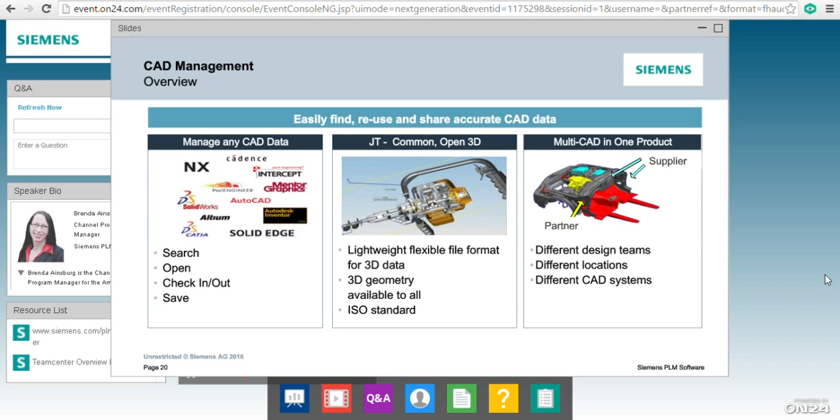I went ahead a little bit so that we look at different design teams and different locations, different CAD systems, and how that JT format pulls everything together so we can look at a whole entire assembly made from 4 or 5 different CAD systems and interrogate that, doing tolerance analysis, any type of volume analysis, how the parts are meshing together, what parts are missing, and see missing links between the other parts.

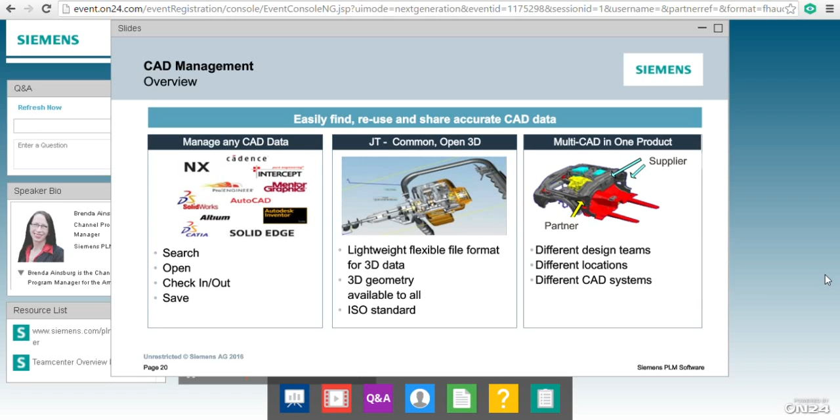So with that, we're going to play a short video, and I'll talk through it, just to let you see the kind of things we can do with Teamcenter in managing almost any CAD system.

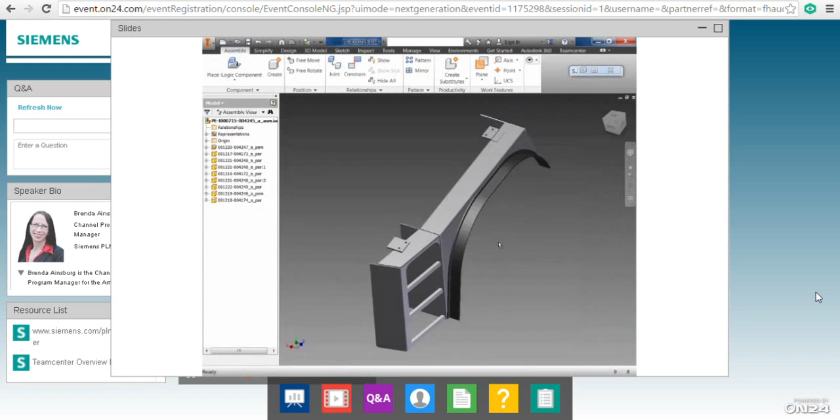In this scenario we're using the Inventor integration, so you can understand how this works with Inventor. You can see here we're in Inventor, and there's a Teamcenter dialog box at the top, a little menu screen, so the Inventor user stays in his session. This is no different than the SolidWorks Pro integration. We have the integration built right into the CAD tool, so he never has to go out of the CAD tool. He can do all his work and have all access into Teamcenter through the CAD tool, so he's not jumping around in different clients.

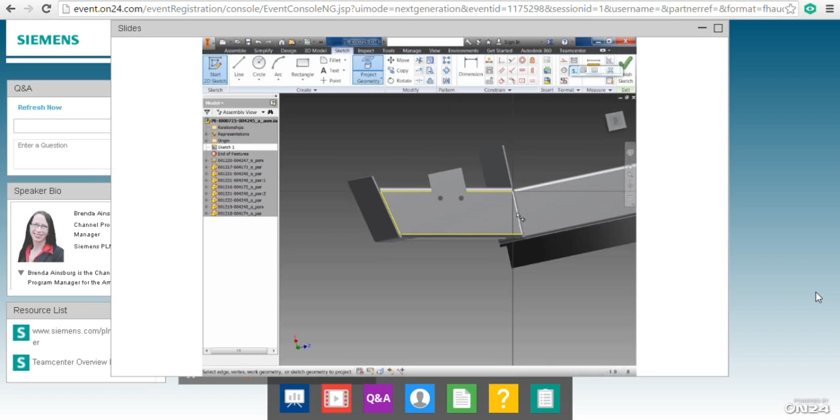One capability of Inventor is that we support all of the out-of-the-box Inventor plugins, the Autodesk plugins. There are a few third-party Autodesk plugins that we support, but that would be considered on a user-based scenario of how much we'd have to integrate that.

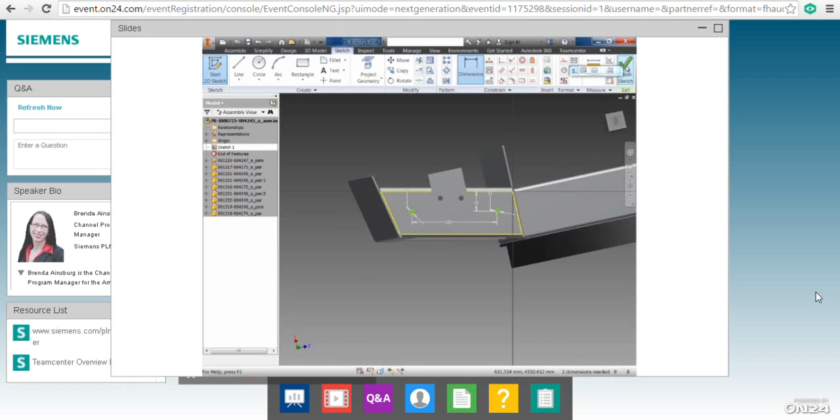You can see as he works through Inventor, he pops through and does his work as the CAD user. He doesn't need to know anything else about the PDM, because this is really done behind the scenes. All of these parameters popping up on screen, and all the different pieces to this part, once it gets into Teamcenter, the viewer converts it into a JT so you can view it within the Teamcenter window.

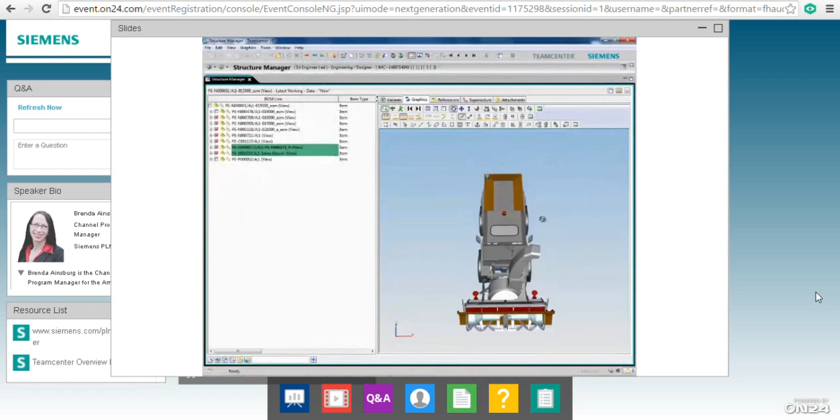Now this is the CAD session, and you can see they're actually going to revise the part. He's saving it, and the only difference between the integration and your typical Inventor is where you're saving the file to - we've actually saved the file into the database.

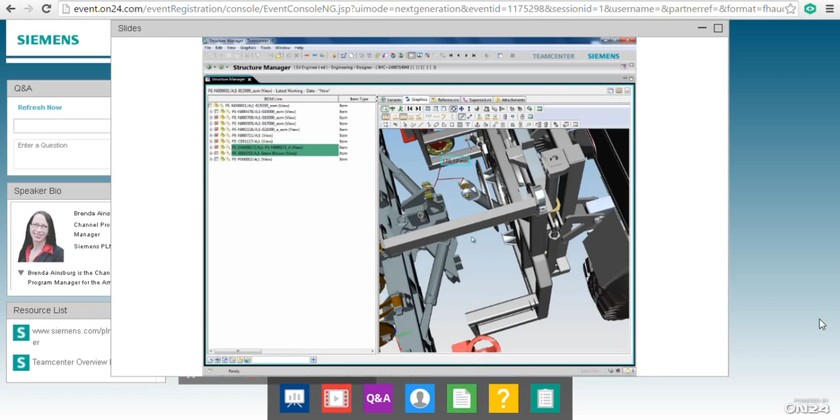This is actually a multi-CAD environment right now. This snowblower assembly is made of multiple CAD systems. What we want to show you here is I don't need a CAD system to interrogate, to measure, to mark up the designs or even the assemblies if we're doing some collaboration.

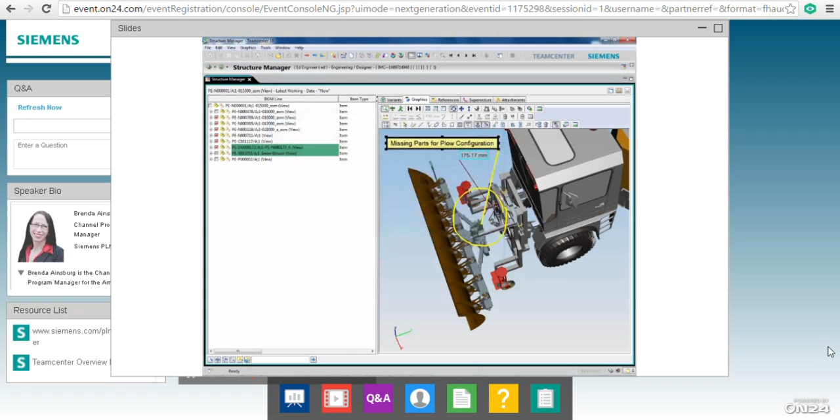We know that in this scenario there's a missing part. We have to build a part, and now we can actually take down some dimensions, measure everything up, so we can turn around and go build a part with the proper dimensions. Again, you don't need a CAD seat to do this, so a manager or a designer can get in the window, see all the parts together, and be able to say, hey, you need to go build this new link.

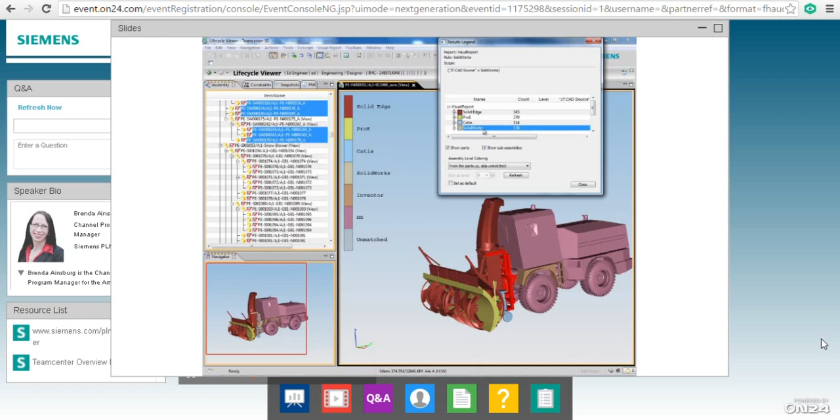In this scenario, what we're doing is interrogating the model to see what CAD system makes up this entire assembly. You can see we have a whole bunch of different CAD models in there. We can do a quick analysis to say, here's the Inventor team, here's the SolidWorks team, here's the CATIA team, and then go back to the appropriate people to say who's going to build what part. It could be that we want the NX team to build those parts.

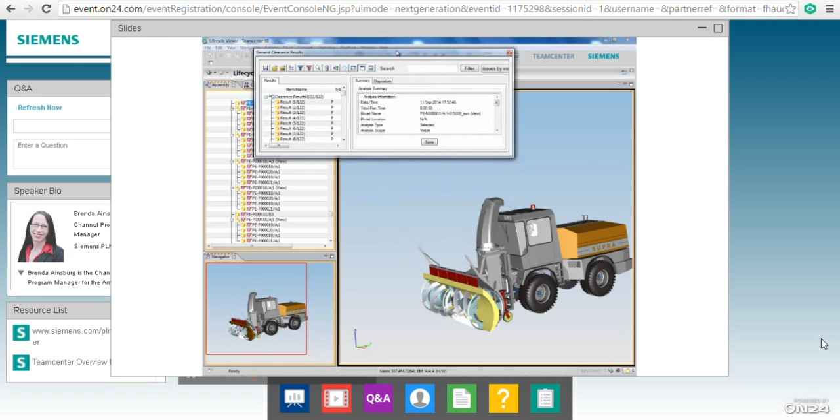The other capability we have with our visualization tool is, again, this is a multi-CAD part, and we can do things like interrogate the part - tolerance analysis, fit analysis, all different things with our visualization tool. The important takeaway is that our visualization tool and the JT format is an ISO standard, accepted by the ISO community, and a lot of people are using this right now because you do not need 5 different CAD tools to do this analysis. You can bring all your parts together into one assembly and do analysis as you would having all your parts in the native format.

Great, so here we have more. We have our next polling question: what CAD tools are within your environment right now?

Select all that apply. As Kip said earlier, many people work in a multi-CAD environment, and he was even showing how that assembly was actually made of files from multiple CAD tools. So we'd like to know what CAD tools are within your environment. Go ahead and grab your mouse and select all that apply.

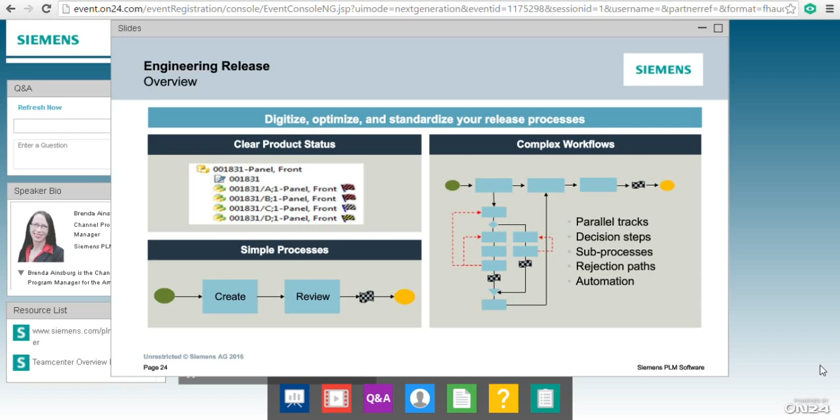So here we have another video that we're going to play, showing how we actually go through a workflow process within Teamcenter, getting the Teamcenter information.

It's called Active Workspace. A new video will start playing—Active Workspace is a no-footprint application, basically a website that connects to Teamcenter. This website gives you access to all the data, all the disciplines. It can be controlled depending on what department or role you are in, limiting the information you can see. But this can be viewed on any device that is HTML or HTML5 compliant, and you can step through the workflows and interrogate your parts.

Here in this scenario, what we're doing is sending a part or document over to be released, and we can quickly do this. So if you're traveling and need to be mobile, you can still have access. You see all the steps in the workflow, what's been completed and what hasn't. You have your inbox showing things that haven't been done yet, processes where somebody's waiting for you to do something, or you're waiting for somebody else to complete something.